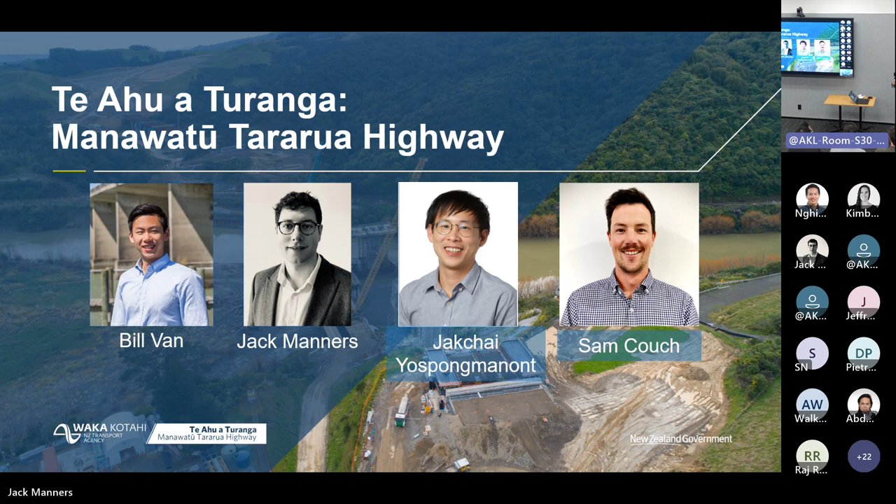Thank you, Kim, as well as the Auckland Bridge Group for inviting us. We're excited to share with you some excellent engineering work and also some lessons learned. I'm joined here with my more esteemed colleagues, Jack, Sam, and Jakchai, and they'll introduce themselves more later on. I'm Bill Van.

Landslides. There have been quite a few landslides in the past, which closed down State Highway 3. And in 2017, it was deemed that it was no longer a safe or resilient route for what is quite an important asset to the bottom of the North Island, and hence the need for this project, Te Ahu a Turanga.

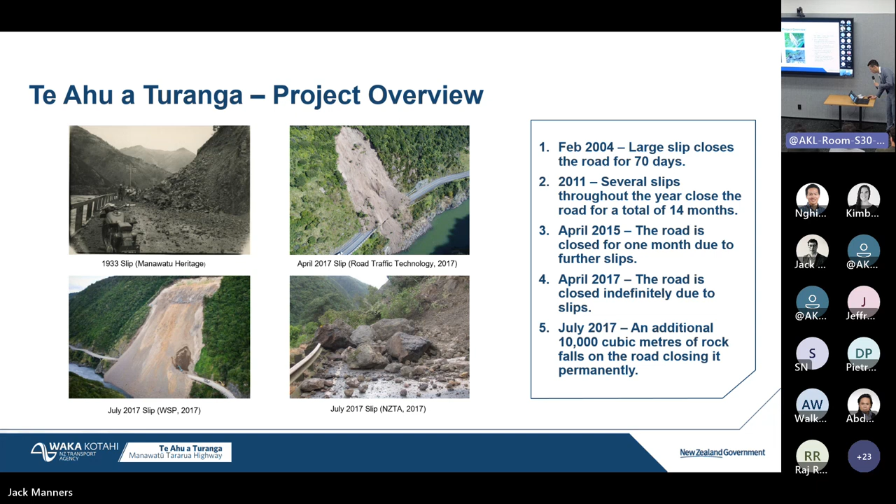The site also poses quite a few challenges. For example, we are in a region of very high seismicity. There is the mighty Manawatū River, which runs underneath the Parahaki Bridge, and also it is very, very windy.

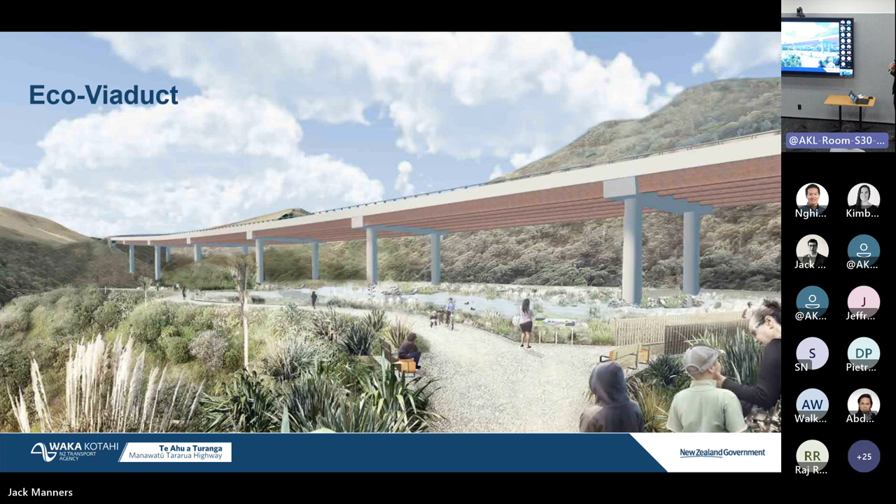Thank you, Bill. Kia ora, everyone. Jack Manners, I'm a bridge engineer here at Aurecon, and as part of the Te Ahu a Turanga Alliance, I worked on the substructure design of Bridge 3, or Eco Viaduct. Fairly brief presentation this evening because we've got a lot to get through, but I'll give a broad overview of the design before going into a bit of depth on the seismic design and philosophy, how we designed for reasonably uncertain ground conditions through the design period, and then touch on one of the key features, the integral pierhead design.

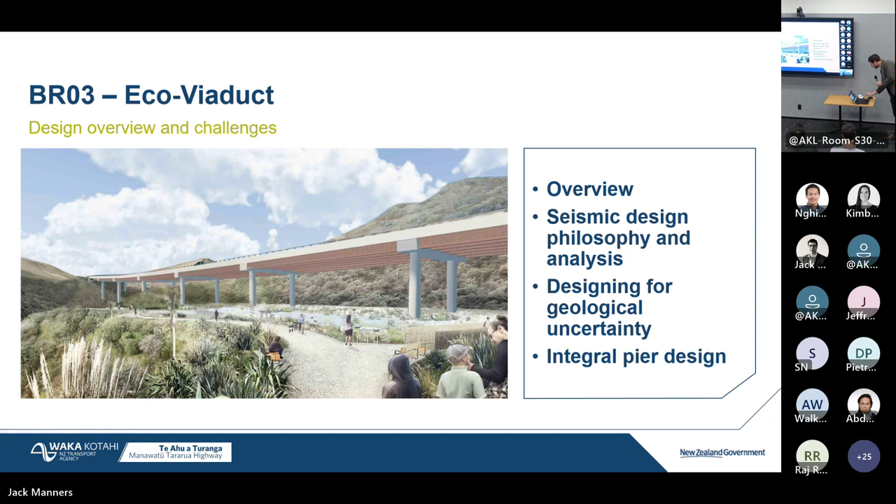So I get this question a lot - Eco Viaduct, why the name? The site and alignment through this area passes through both an ecologically and culturally sensitive zone. On the western edge of the alignment is an old-growth forest of native trees. The southern side has both a swamp maire and a raupo wetland. Historically, this was a mahinga kai area, a harvest area for the local iwi, and the iwi were project partners as part of the alliance.

So these site constraints, some legislated in planning, drove the solution for a viaduct. I get a lot of questions around whether this is a low carbon bridge design - yes, in some ways, but that's not the driver for the name Eco Viaduct. It's to reflect the site that it takes the new State Highway 3 alignment through.

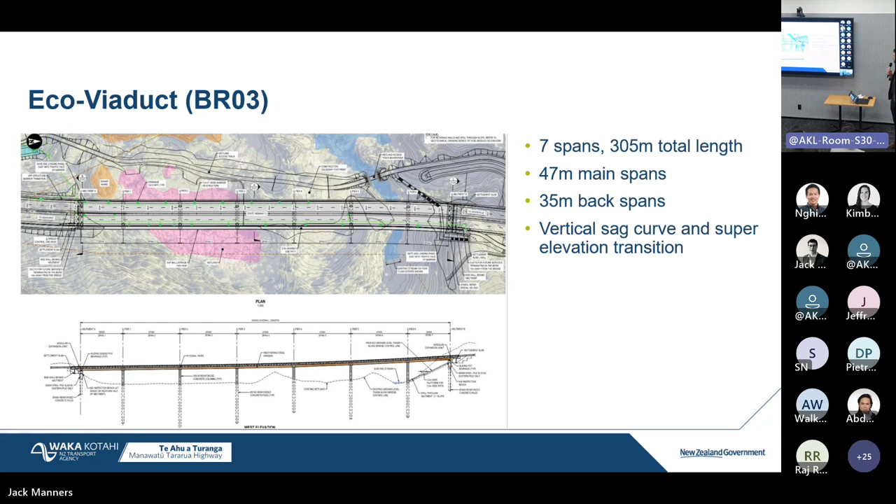Specifically on the bridge: a 7-span structure, 305 metre total length. The 6 main spans are 47 metres long, with 2 back spans of 35 metres. Geometrically it's on a vertical sag curve, and there's a super elevation transition from the south abutment to the north abutment, which posed a few design and construction challenges.

The structure carries 2 traffic lanes in both directions, as well as a shared use path attached to the eastern side of the bridge. The superstructure, which I'm not touching on in too much detail, consists of 1.8 metre deep weathering steel I-girders across piers, made composite with a reinforced concrete deck made up of precast panels and an in-situ topping slab.

The piers are integral, as I mentioned before. We've got a reinforced concrete headstock supported on 1.8 metre diameter reinforced concrete piles, columns, and 2.1 metre bored concrete piles. The articulation at the abutments is on sliding pot bearings and some fairly large modular expansion joints.

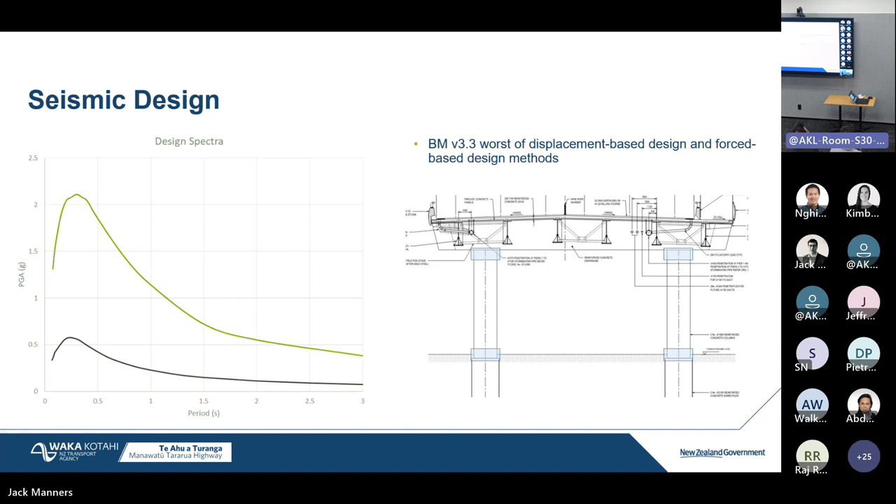Like I said, can't go into too much detail, but a few key overview points: the target displacement transversely under the displacement-based design method was 470 mils transversely at midspan at the DCLS strain limits. Depending on a bunch of factors, including stiffness and geology, the global ductility of the structure under that case was approximately 2.9 to 3.

The image from the analysis model shows an excerpt from the Midas nonlinear pushover analysis, and we used that analysis method more as a confirmation of the displacement-based approach, but also to determine the overstrength actions outside of the plastic hinge zones, particularly at depth in the piles.

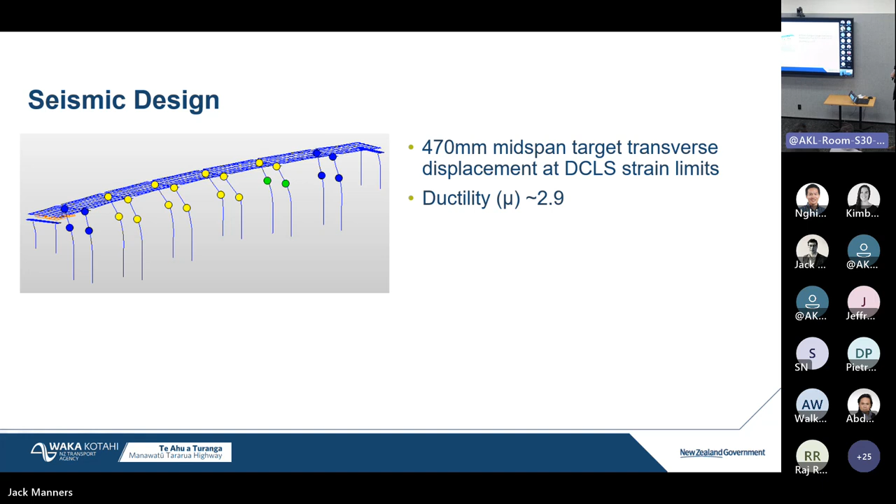And what we found through the process was the force-based design generally gave 5 to 10% higher bending and shear actions than the displacement-based design. And while that increase doesn't drive a totally new solution like a step change in pile size or column diameter, it does increase reinforcement, increases congestion, and probably most notably for this structure, because of that demand, the overstrength actions really shoot up in the adjacent elements to the hinges.

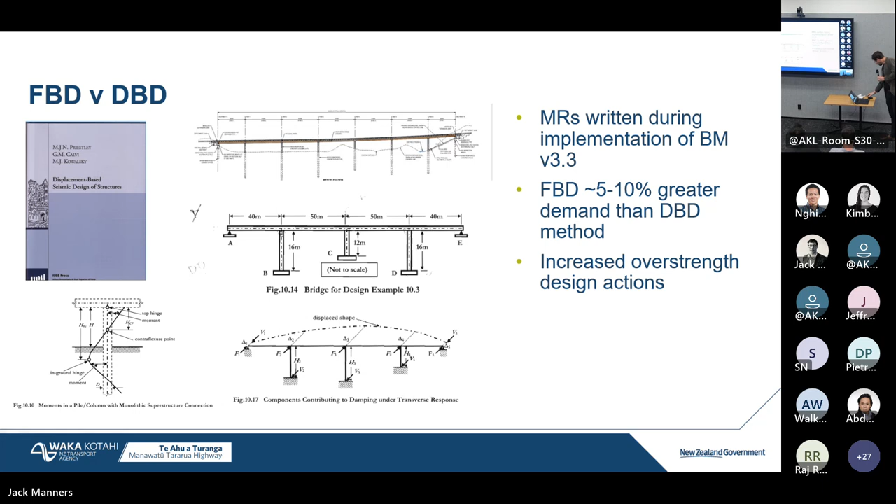The other key challenge for Bridge 3 was what I'm terming designing for geological uncertainty, which is not uncommon on bridge projects, but I think was particularly uncertain for this structure.

And as we came through and completed some of the investigations later on in the design, we encountered quite high artesian water pressures, which Sam's going to touch on in his presentation, which drove a couple of changes in the design, but I won't go too much into it now.

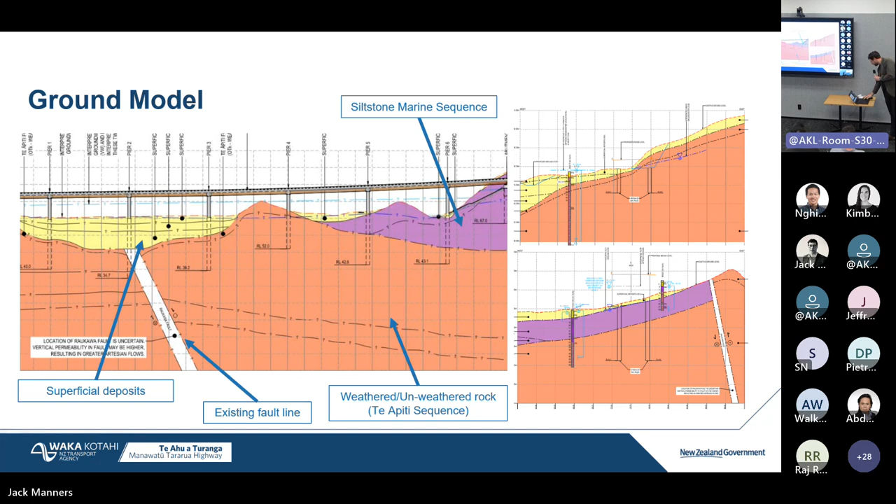So the cross sections shown on the right-hand side of the screen show the predominant slope of the geology through here. And one thing we didn't really have a good feel for was the angle of that slope. So rather than just what we would typically do for the sensitivity of geotechnical conditions, we had to do a little bit more to satisfy ourselves that the design was adequate.

So what we did was, rather than just applying material sensitivity, we did a sensitivity of stratigraphy, where we assumed both the upper bound, or the shallowest conceivable rock head, and the deepest conceivable rock head. And that essentially gives us the stiffest response and the softest response.

On top of that broad category, we also applied material sensitivity. So that ends up in a lot of models, a lot of analysis, and a lot of rework if you make one mistake in one model, or you discover one mistake in a model. But I think it was a good way to mitigate the increased risk that we usually have in terms of geology and uncertainty.

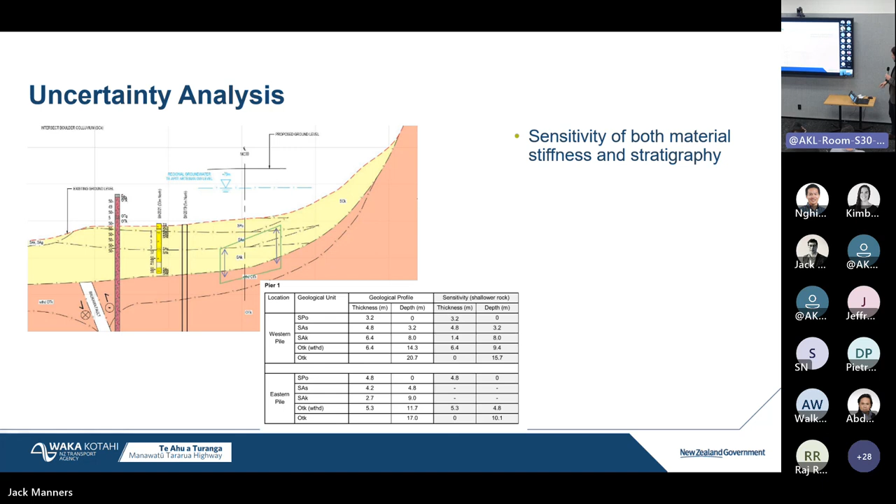The last thing I'd like to talk about is the integral pier. It's a key design feature of the bridge, driven by two key outcome areas: low maintenance design, and as discussed earlier, this is quite a sensitive area, so we're trying to eliminate or minimise the amount of access, particularly from the ground, to the piers. It's also driven by the aesthetic outcome of the bridge and trying to minimise the overall depth of the bridge at the pier locations.

Integral piers aren't anything new. They're becoming increasingly common in New Zealand and are common overseas. Typically what we do is form these in a two-stage pour: pour a concrete headstock element as stage one, land the girders and superstructure on top of it, then cast it integral with a secondary pour. For bridge 3, we essentially eliminated the bottom half of the first pour and poured this as a single stage pour. That minimises the concrete depth and overall material below the bottom flange of the superstructure, which gives a really neat and unique aesthetic look, but does pose some design challenges.

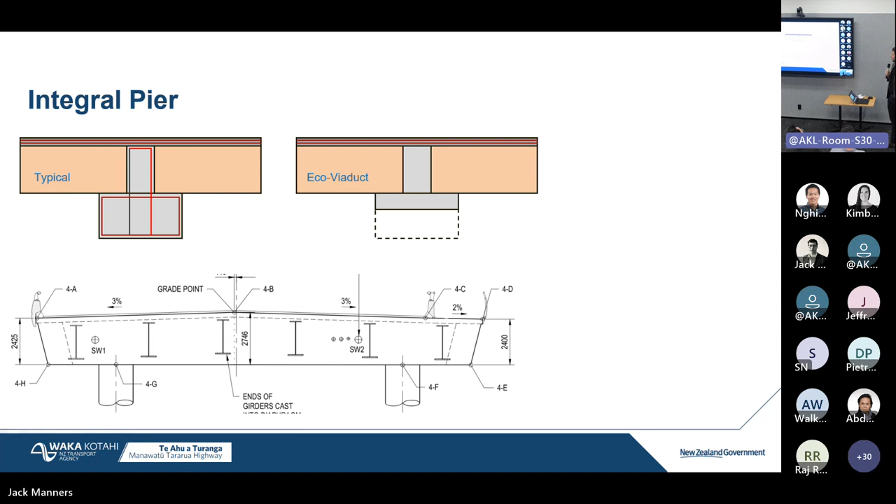Our thinking for this connection definitely progressed through the design process. At 50% design and earlier, we had a solution where we assessed that the top flange of the girder remained permanently in tension and the bottom flange was permanently in compression. So our solution was to take the compression out of the bottom flange through a bearing plate, which eliminated the need for a full splice. The key benefit for the substructure and superstructure design was that it frees up that middle section of the headstock to be used as a continuous structural concrete element through the length of the pier.

But as we progressed the analysis and off the back of some geological modelling that we did, we couldn't convince ourselves that under all seismic load cases the bottom flange remained permanently in compression, so we needed to provide a full splice through the headstock area. This introduces a lot of additional steelwork through the headstock, a lot of bolts and shear studs, and it also removes that continuous concrete element that we previously had running through the centre of the headstock.

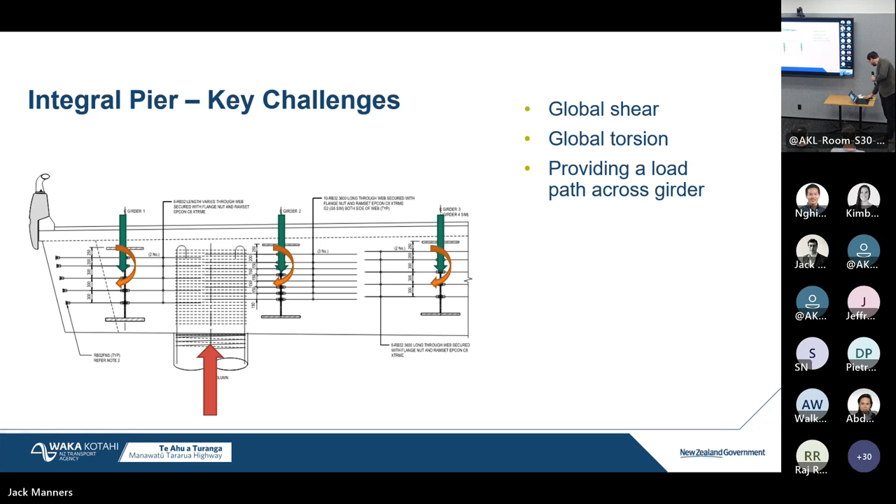For global shear, essentially the philosophy was to take the vertical load that exists in the girders out through both shear studs located on the web, as well as passing bars through the web, which are clamped onto the web using a flange nut through shear friction. The flange nut, which was quite a unique solution, allows us to adopt a higher coefficient of friction in order to take more shear out through those bars than we would just passing bars through a slotted hole.

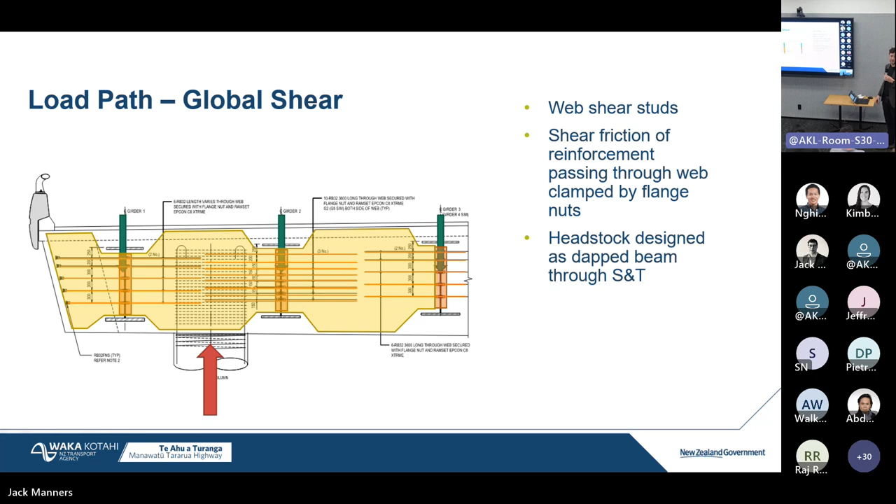In terms of the concrete section, we essentially assumed the section as a series of deep beams, and that was analysed through a strut and tie model, locally reducing the height of the concrete section as it passes through the girder section under the flanges.

Global torsion is a similar problem. We've got to get the torsion that exists in the headstock across these girders. Typically we allow a torsional flow path around the perimeter of the concrete unit, but obviously that flow path is not valid once we put a beam continuously through the section. So what we did was a similar philosophy: taking the bending stresses that exist in the flanges out through shear studs, located on top and below both of the flanges. We then have drag bars, horizontal reinforcing drag bars, through what we've imagined as two 500 deep concrete sections, which act in out-of-plane bending to take the bending stresses from the shear studs into the concrete section, rather than a full tubular wall flow path that we would typically do.

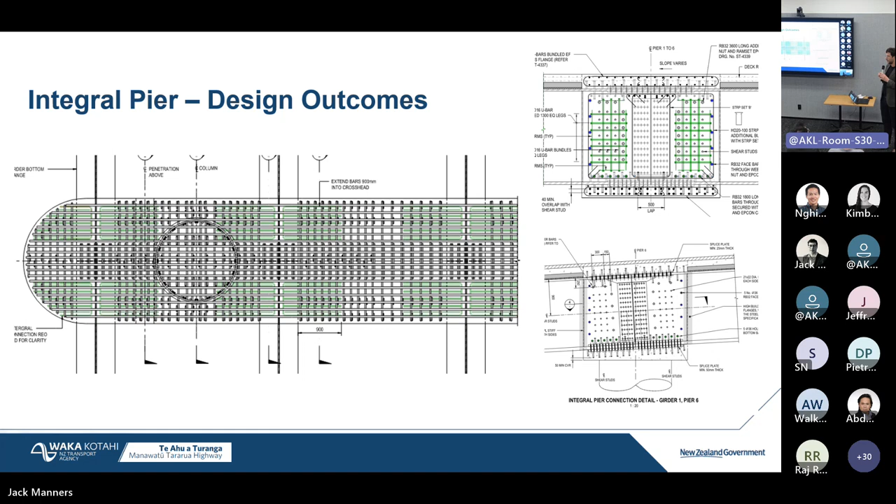In terms of the design outcomes, because of that, a lot of reinforcement. We already had a lot of reinforcement in the headstock due to the overstrength actions based on the hinge at the top of the column. On top of that, we added a number of quite unique bars, including a huge number of shear studs to take out both vertical and bending stresses, as well as bars passing through the girders with flange nuts. So a very unique solution, a lot of reinforcement, which I'm sure Sam will touch on as part of his presentation. But I think all in all, we developed a very unique solution that addresses the site constraints and objectives for the bridge, and has led to a really neat outcome aesthetically, now that you can see them being constructed, and Sam's got some photos of them later. That's all I had for Bridge 3.

Happy to take any questions at the end of the presentation, but I'll now hand to Jakchai to take us through Parahaki Bridge.

Hi everyone, I'm Jakchai, bridge engineer from Aurecon. So I'll be covering Parahaki Bridge today, which I think, let me go to the first slide.

I think Bill already introduced the overall arrangement of the Parahaki Bridge, which I wouldn't repeat. I just want to add one other thing about the substructure scale compared to the superstructure scale. The pier column varies from 19 to 25 meters from pier 1 to pier 3, and the box girder itself has a typical width of around 25.75 meters, which carries both the traffic lanes and the shared path. And in plan view, the bridge is constructed on a horizontal radius of about 725 meters and on a 1% vertical grade.

Next I want to touch on the seismic design criteria and inputs for the bridge. The bridge design life is 100 years in accordance with the bridge manual. We have adopted importance level 3 for the bridge. Our main compliance will be similar to Bridge 3, which is the bridge manual amendment 3, third edition. But we also adopted the AASHTO guide specification for isolation design, because the bridge is proposed to be a base isolated structure. For the DCLS event earthquake, the RU is taken as 1.3 at a 1,000 year return period. Typically for the collapse avoidance limit state it would be 1.5 times the DCLS, and for SLS it would be a quarter of the DCLS.

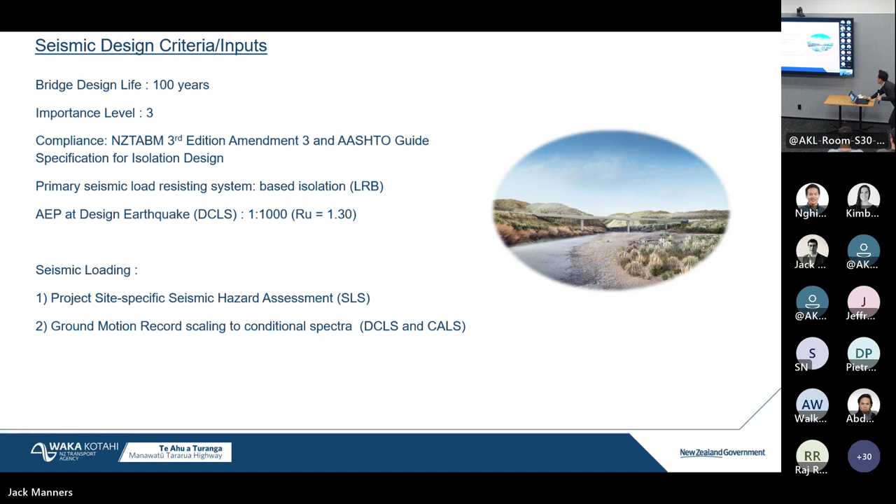This slide shows a snapshot where the table is the ground motion record input that we received from EGL, an engineering geology consultant. Basically we have a total of 7 records, and each record has been scaled and selected to be appropriate to the conditional spectra for the project. Records 3 to 5 have directivity effects, or forward directivity, reflecting the fact that the bridge is located in the proximity of an active fault, within 20 kilometers, so near fault consideration needs to be considered. Also, the 1170.5 earthquake standard requires 1 in 3 of the ground motions to have forward directivity effects, which is why we have that.

I will not touch on the detailed nonlinear time history analysis today because of time limits, but I want to point out why we propose to use it for the bridge. First, the bridge is located within 10 kilometers of 2 faults, and we don't really know the final status of the faults, whether they will be active or not, but we assume them to be active. In the early stage of the design, we understood that the site condition can be a soft soil site. Lastly, we want to understand the detailed dynamic behavior of the isolator, so we can understand the loading history and review the design outcome of the isolator better.

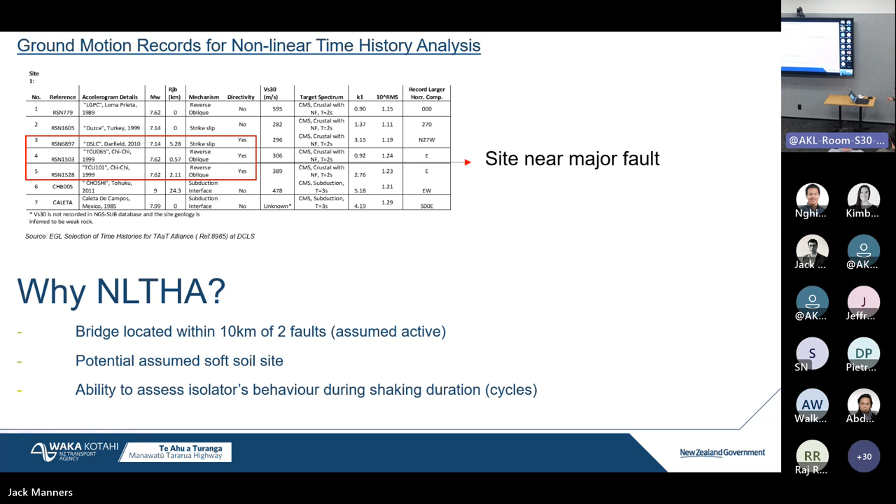Okay, next slide. So next one is for the seismic design philosophy for the bridge. In the SLS earthquake limit state, we expect no damage incurred to the bridge structure, and the bridge will be serviceable during the earthquake event at the service limit state.

Next one is the damage control limit state, which I put as the low damage design approach. Basically we want to design up to the design earthquake event. We propose the bridge to be base isolated so that the lead bearing can dissipate the earthquake energy, reducing the seismic demand, so that the substructure can be designed to remain elastic and therefore no repair is needed at the design earthquake event.

So at the collapse avoidance limit state, we expect the bridge to respond in a limited ductile manner at the maximum design displacement of the isolator. Basically, the design may allow some inelastic response of the pier column, which can be accessible for repair after the major earthquake event.

I think I should go to the next slide to give everyone an overview of the substructure system. Before I come back to the design philosophy, the abutment is a shallow footing foundation sitting on the preparation of the geotechnical subgrade, and the abutment is 6.5 meters wide by 2 meters deep. The total width of the abutment to carry the box girder is about 26 meters, as you can see on the screen.

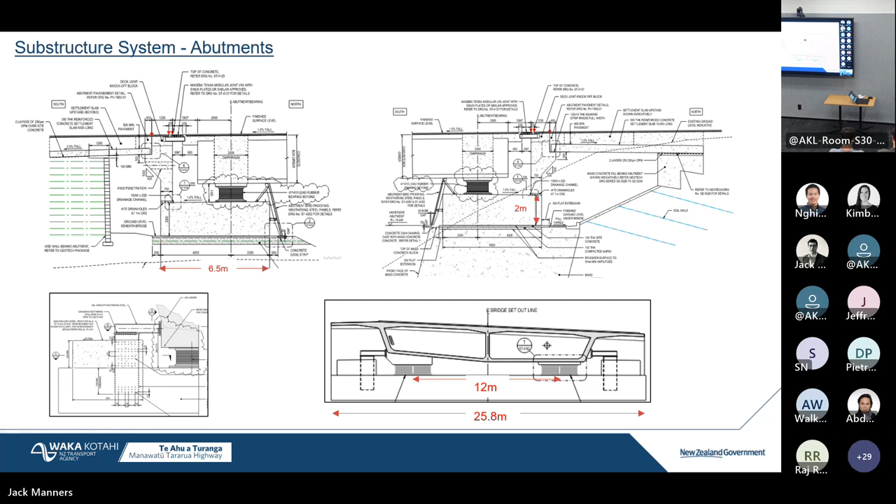Next one is the pier system. The pier system is a cantilever reinforced concrete column. The pier shape has an oblong-like cross section with a hollow core section, but the top 2 meters of the pier is a solid section to support the lead rubber bearing and also the superstructure on top of it.

Then the pier column will be supported on top of a 14 by 14 meter and 3 meter deep pile cap, which sits on 8 number reinforced concrete bored piles, with the diameter of the pile being 2.1 meters.

I think Sam will touch on this during the challenges in construction, but at pier 3 here, we need to rotate our pile cap quite a bit, about 39 degrees, which makes it irregular. We did it to ensure that the clearance to the hazard inner zone to the rail can be achieved, and it has to be greater than 10 meters.

Okay, so this slide here is the main thing I would like to cover today, and it is about the base isolated structure. As I said before, we propose to use the lead rubber bearing isolator as the primary earthquake load resisting system.

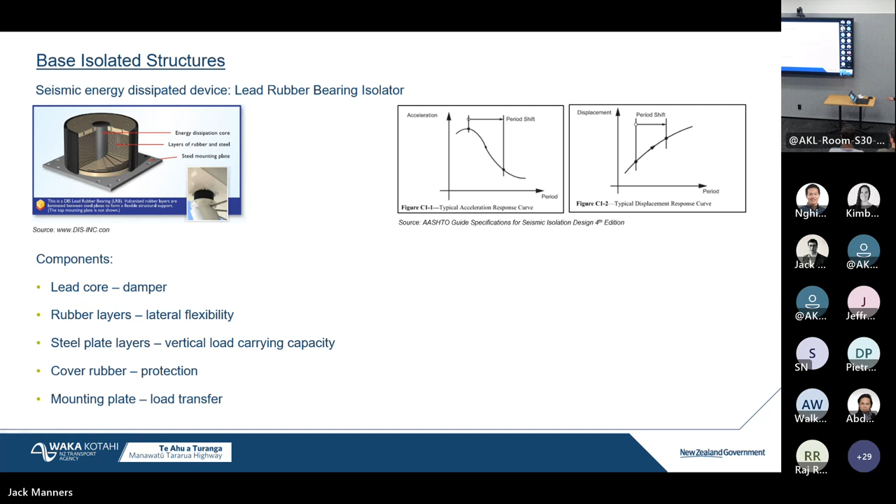So what we want to make sure is our design is capable of resisting the maximum shear strain that occurs to the isolator. I want to give a commentary on this: in the bridge manual, it says that under an earthquake event, when you use the elastomeric bearing or lead rubber bearing, you shouldn't exceed, I think, 100% shear strain.

But from study of the International Code of Practice, there were other limits, like 200% shear strain and up to 250% shear strain. So in our project, we propose our limiting shear strain to be 250% at the maximum design displacement, which I will touch on at the end of the slide, explaining why we think this is achievable.

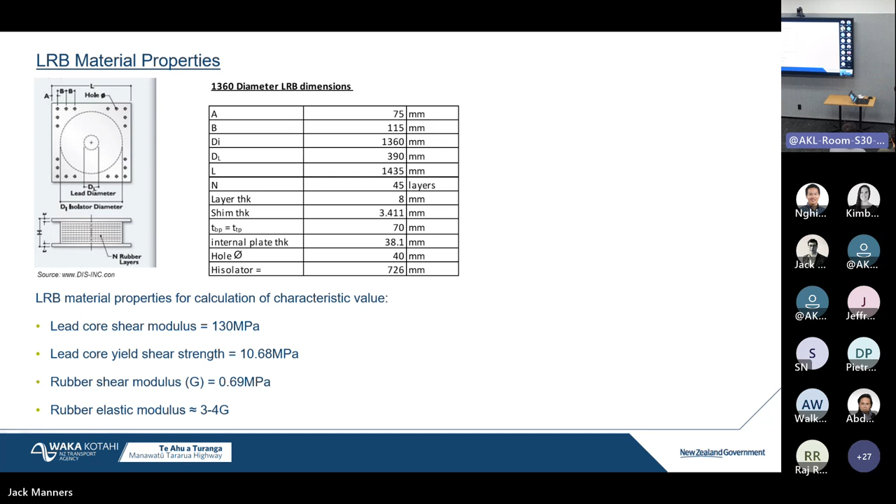These material properties that I put here, I think they are quite typical and accepted in the industry for the lead rubber bearing.

For the vertical direction, the way to calculate the compressive stiffness is straightforward, and this can be given by the suppliers as well.

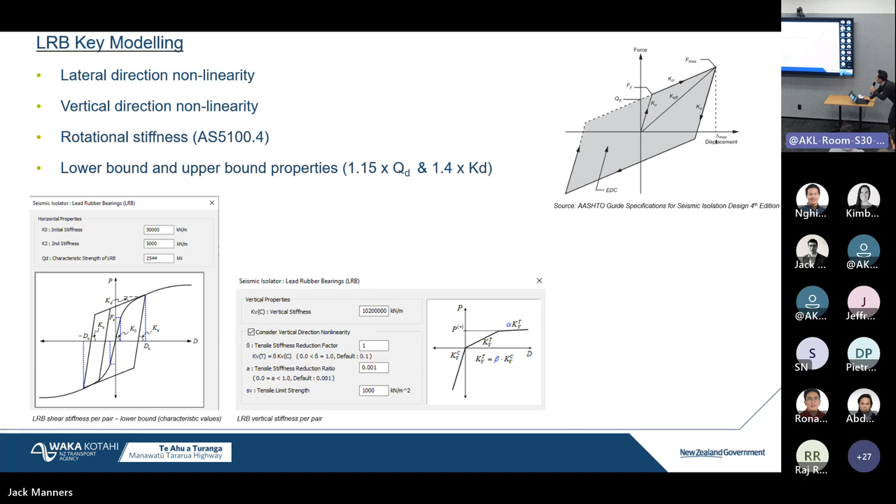So that I think I have covered the key modeling that we have considered.

This slide here, I just want to talk about for 10 seconds. I'm not trying to get everyone to read through the graph, but I just want to say that from now on I will present some key findings. When we obtain the displacement from the model, we have to average it across the 7 records that we input into our structural model. So the design displacement will be the averaging of peak response over maxima and minima across the 7 records that we have.

The first key finding: we ran the model considering soil structure interaction, as typically required, and also the lower bound and upper bound property of the bearing. For the maximum design displacement of the lead rubber bearing in our bridge, we got it to be around 955 millimeters, with a corresponding axial load of about 6 meganewtons.

After we obtain the desired displacement, we make sure it works from the supplier side as well for the size. Then we can calculate the effective isolated structural period at the collapse avoidance limit state, which is 3.2 seconds, and the energy dissipation per cycle, which is about 4,500 kilojoules. Then we calculated the rated axial capacity at the maximum total design displacement, which is about 14 meganewtons per bearing. So the capacity is beyond the demand.

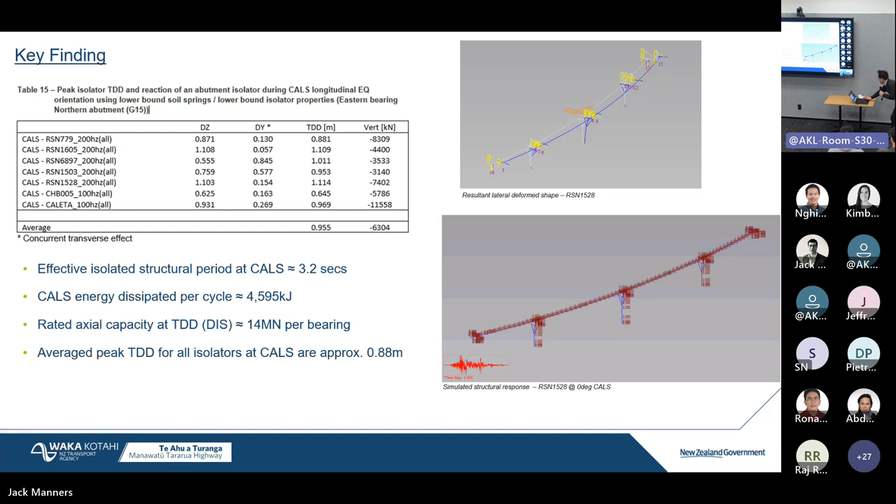That's it, it helped a little bit. Okay, so the next key finding.

We hope it did not happen, but as it happened, we justify that we calculate the tensile stress based on this tension demand, and it's about 0.25 MPa. Also, the tension demand occurs at only one pair out of all the lead rubber bearings in the system, which we have about 26 bearings in total. We can also equate the tensile stress demand into the corresponding uplift deformation, which is less than 2 millimeters.

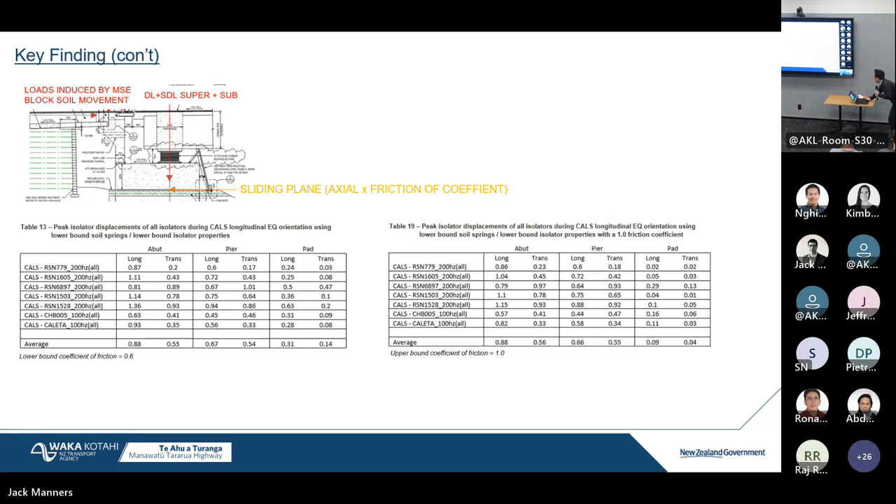And my last slide - I just want to cover the seismic performance verification. Once we finished our proposed design, we also want to ensure that the lead rubber bearing configuration we propose is going to work, and this is going to be done via verification testing. We base our verification testing on the AASHTO specification again. Basically we have to test for sustained compressive load, wind and braking test before and after the seismic event, stability tests, and wear and fatigue tests. But I won't go into too much detail on this - I just want to turn on the video and show you how it was done for our project.

Okay, that's it. So basically, this is the test at the second cycle, and the bearing was tested to displace up to the collapse avoidance limit state displacement, and it still looked okay, which I'm happy with. The last one here is just the plot of the force and deformation relationship. I think, just to make sure that the energy dissipation and everything that we set out in our specification can be met.

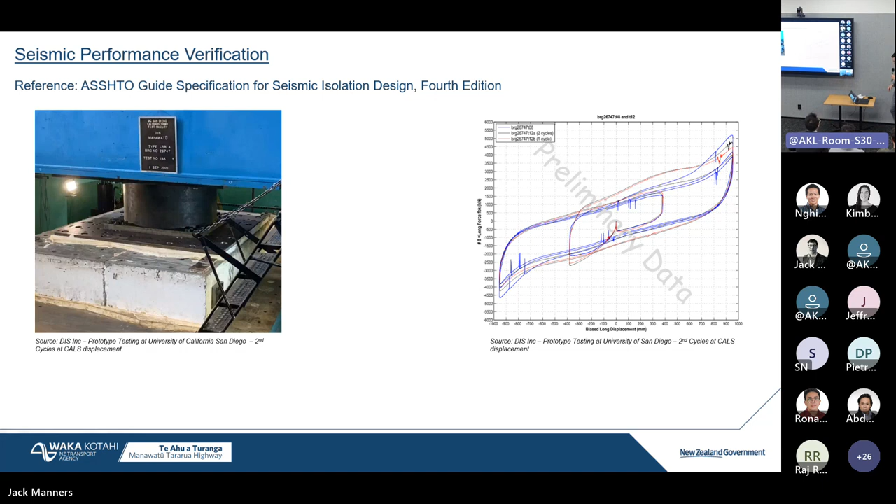Cool. Thanks, Jack. I've watched that video many, many times, and I always wonder, is it going to break this time? But it never does.

Okay, so I'm Bill, and I'm part of the Road Lab team and the lead superstructure designer for the Parahaki Bridge. I was asked to reflect on what's the most difficult or challenging part of the design. And I've got to say, it must be one thing, and it is the interaction between the permanent works and temporary works.

I just want to do a quick population survey. Who here is in the consultant space? And the construction space, contractors? Right, okay, I'll just have to watch what I say.

This presentation isn't going to have all the details or include everything, but I just want to highlight the complexity of this interaction. And for a successful project, this is critical.

So this bridge is built by the balanced cantilever method. In general, we're starting construction from the piers, then building segment by segment in balance. So to walk you through the construction sequence, first the substructure is completed. Then we construct the pier diaphragm as well as the southern end span. This portion of the bridge has to be built on falsework, because structurally the end span is usually longer than the cantilever of the bridge, so it can't be built in balance.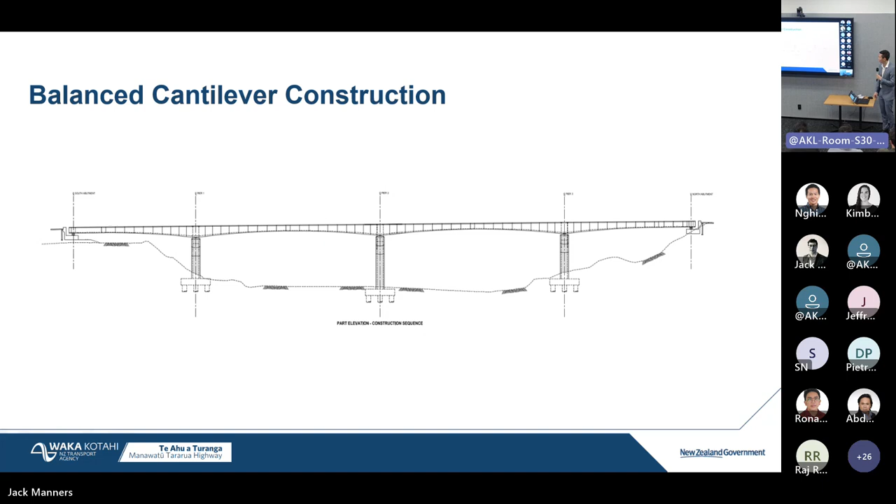So I want to focus on two key components of this construction methodology and some of the temporary works: the form traveler and the end span falsework. This presentation looks at how the design evolves and what are some of the interactions between the permanent works designer and the temporary works designer. It might be old news for some of you who have designed multiple box girders, but hopefully it gives you insight into the key considerations when designing your first box girder bridge.

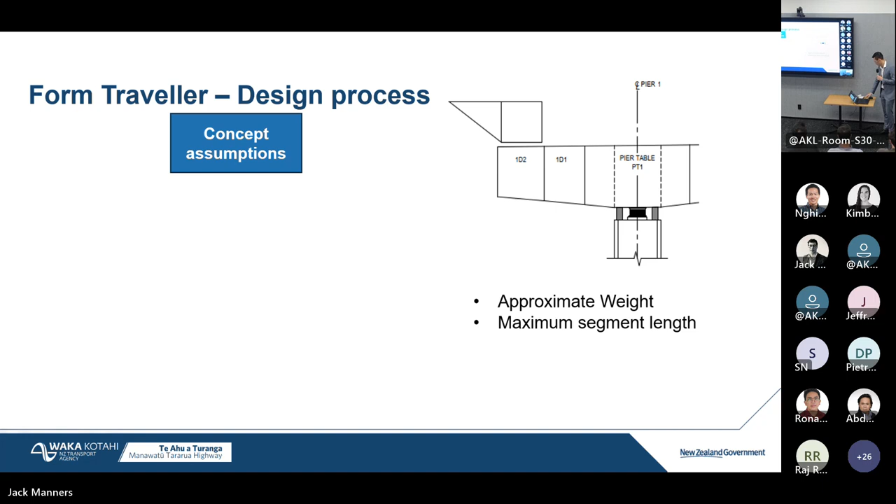So for the form traveler, the concept assumption is pretty simplistic - just a simple shape and an assumed form traveler weight based on a proportion of your maximum segment weight. When it comes to the preliminary design, the designer will be thinking about the post-tensioning layout, the SLS and ULS design criteria, not only for when the bridge is in service, but also when the bridge is under construction.

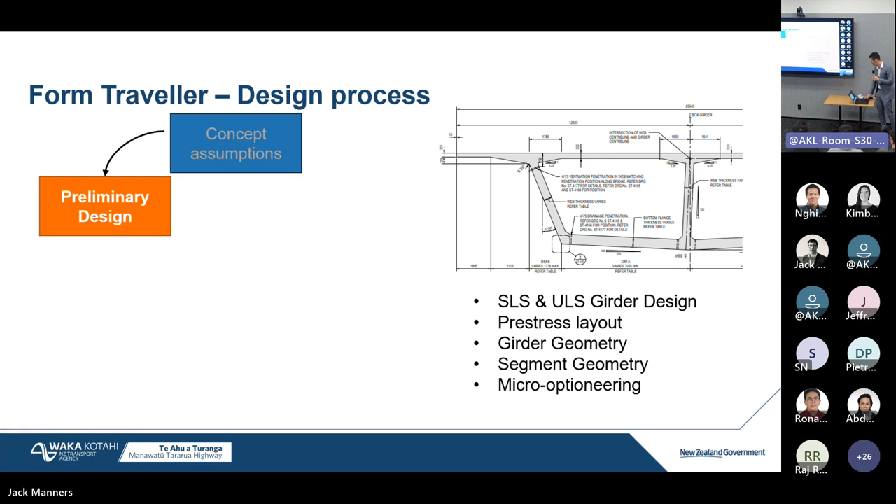This bridge is also a variable depth box girder, meaning it's deeper at the pier and slims down to just 2.5 meters, almost half the depth at midspan - giving a very aesthetic look as well as structural benefits. We'll be looking at how the web thicknesses may need to transition and how all these geometries are confirmed.

With this information, the form traveler designer will be able to look at various features of the form traveler. For example, with this variable depth, how will the formwork allow for these changes? And there could be a change in the form traveler weight.

One of the interactions we looked at, one of the value engineering exercises from early stages, was: could we reduce the program by reducing the number of segments from 10 to 9? It might seem like quite a simple change, but it affects the segment length, the segment weight, the form traveler weight, the post-tensioning layout - everything's connected. So when looking at these early optioneering stages, it's really important that the bridge designer, the construction team, and the temporary works designer work very closely together.

Okay, so it comes down to detailed design. The bridge designer will be looking at confirming girder geometries, confirming the construction sequence, every pour that's made, every stressing operation that happens will have to be modeled in a structural analysis software. Then we also produce reinforcement details and look at how to control the deflection of the bridge when it's being constructed.

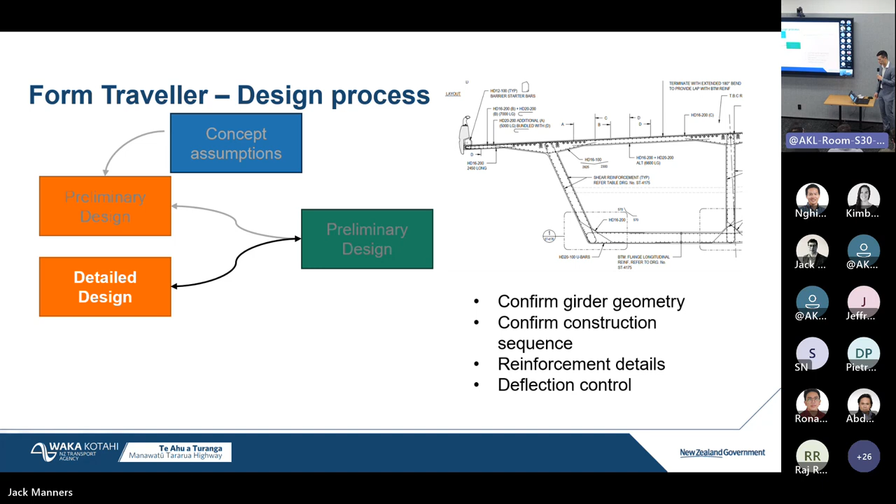And with that finalized, then the form traveler designer can undertake their detailed design. Now this is possibly the most difficult part, when the design requirements of the permanent works and the design requirements of the temporary works conflict. For example, one of the key items still missing in the detailed design is how the girder is going to resist some very localized loads from the form traveler. And this information we don't have until the form traveler design is completed.

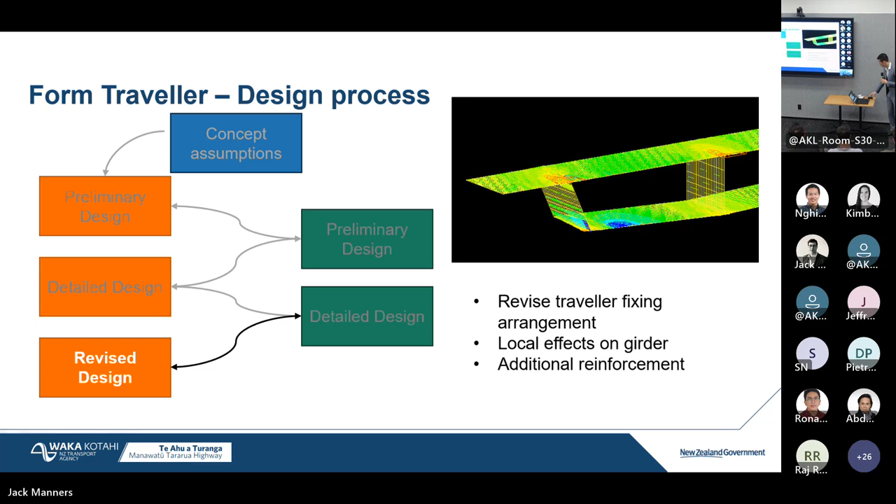I think often it feels like a game of guess who. When you're sitting on the other side of the table, someone else knows the information that you want. So being able to ask the right questions is really an art. I know the analogy kind of breaks down because you don't want the other person on the other side to win and you don't want them to figure it out, but this is the nature of things. We have to be able to interact with various parties.

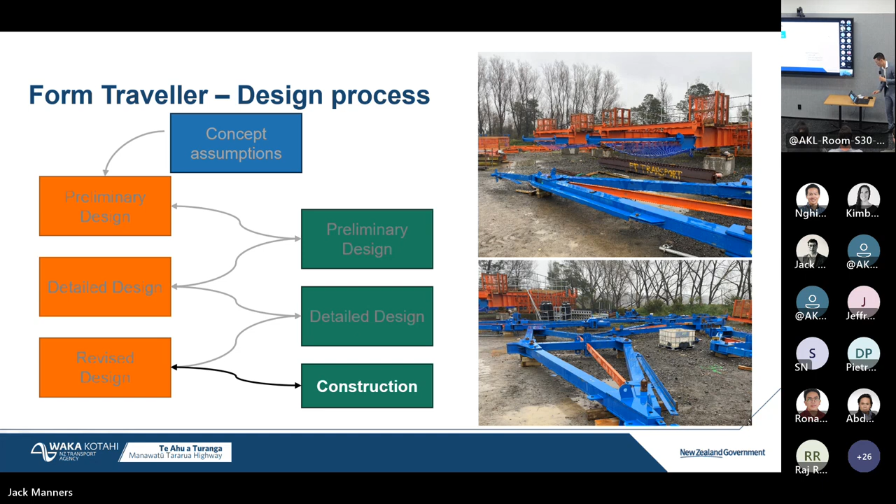Okay, and I want to talk about the end span falsework because I think it really shows off where value engineering finds a better outcome. So the question here is, we've got our balanced cantilever construction with the form traveler reaching out as far as it can go, but then there's still 17 meters that needs to be constructed. And how do we do that?

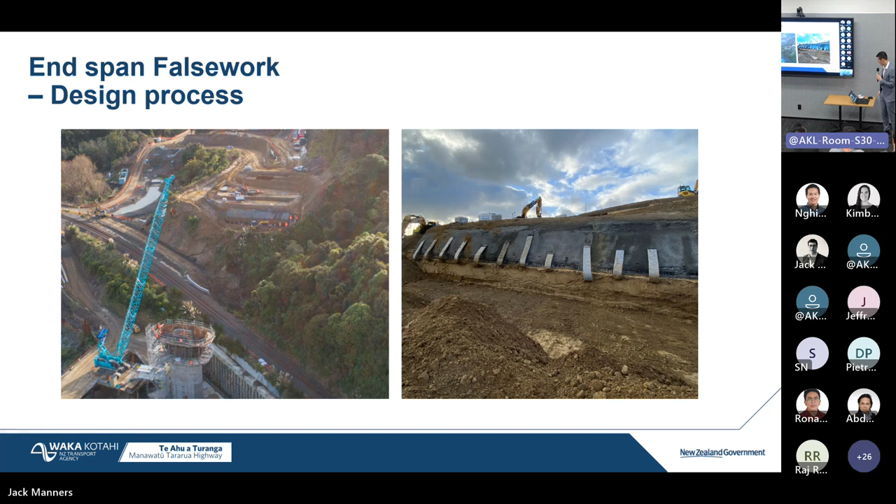So from conceptual design, we thought, what if we continue building this bridge via a cantilever method, but prop it at the bottom to take out the out-of-balance forces? We did find that it needed some complex articulation because we wanted to hold it up vertically, but we don't want it to attract any seismic loads. And also we found that we needed a lot of additional reinforcement in the top flange to hold that cantilever.

When it came to the preliminary design for the temporary works, they also found quite a few challenges. There is a railway that runs next to the prop, maybe 10 meters away, so needing to design for that collision load in the prop was quite onerous. And additionally, there was a cost to program because we still needed to build out 3 segments in cycles.

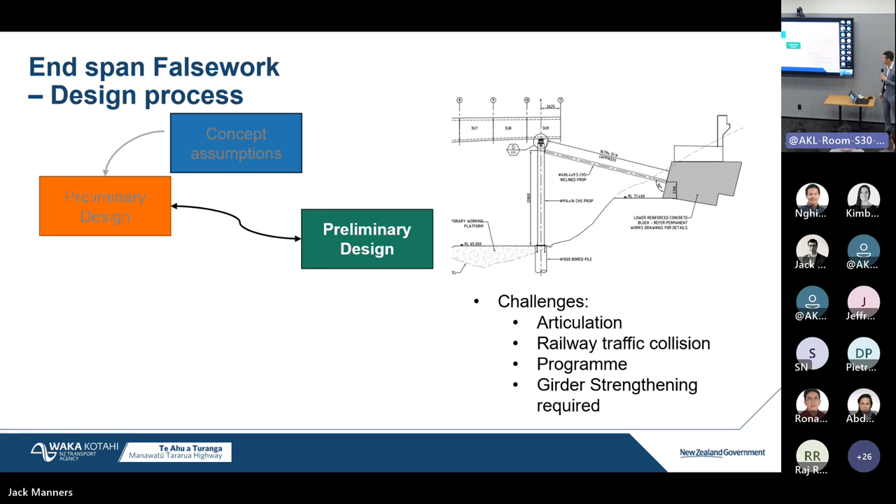So I got to give credit to our temporary works designer, because sometimes coming in with fresh eyes you're able to see options that haven't been discovered previously. This resembles a bit more of a traditional false work, and the temporary works designers were able to find a solution to build false work even on the 15-meter cliff. It has quite a few benefits.

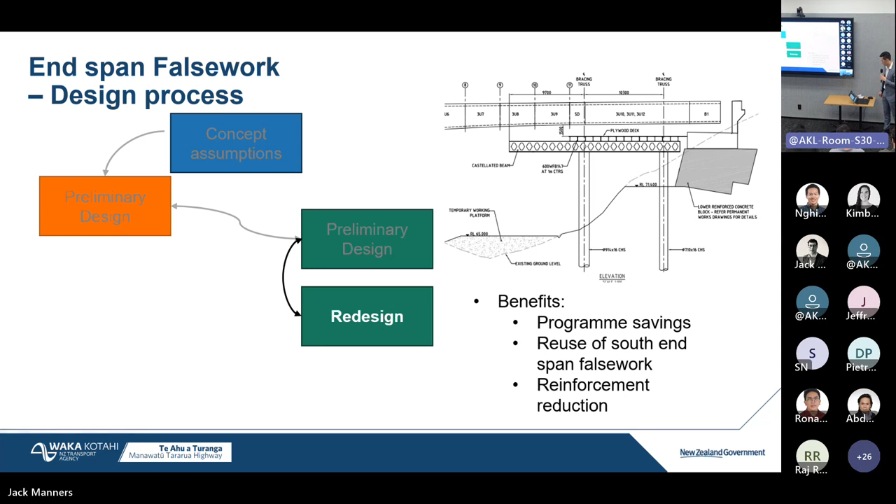For example, we can now build those end segments prior to the balanced cantilever being constructed, and I'm sure Sam's going to touch on it in his presentation. It also has reinforcement reductions.

And at the same time, we are facing quite a few uncertainties in terms of how the bridge behaves. Having a misaligned tip is probably the worst nightmare for building a balanced cantilever bridge, because you're not left with many options. Either you force the tips together, causing a large locked-in stress, or you try to fill it up with leveling course, which increases the weight of your bridge.

So this is critical. The uncertainties that we face include variability in concrete properties — as you know, concrete will creep and shrink over time. Also temperature: for the maximum bridge manual temperature loads, you could see your tip go up and down by 50 mils. So being able to survey at the right time, at the right temperature, is really important.

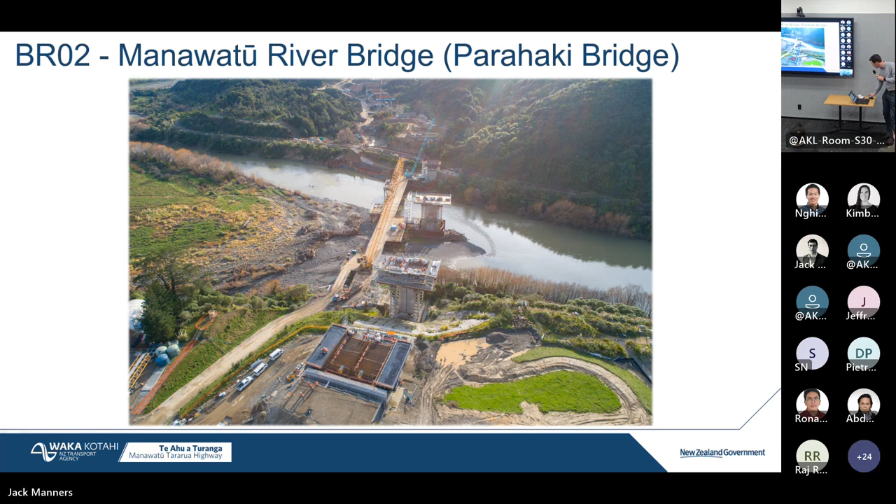This is another quick photo looking up the river. You can see the old State Highway 3 disappearing up the gorge. Got the KiwiRail corridor on the left, which is one of our challenging obstructions in the area. You've got the river itself, and you can just make out one of the biggest slips just up the river on the right-hand side, which has completely buried that road. So that road's pretty much shut off, but people do walk up there. It gives an idea of scale.

One of the big focuses when this bridge was designed was to try and avoid as many piers in the river as possible. So you've got one slap bang in the middle, but the other two are right on the riverbanks.

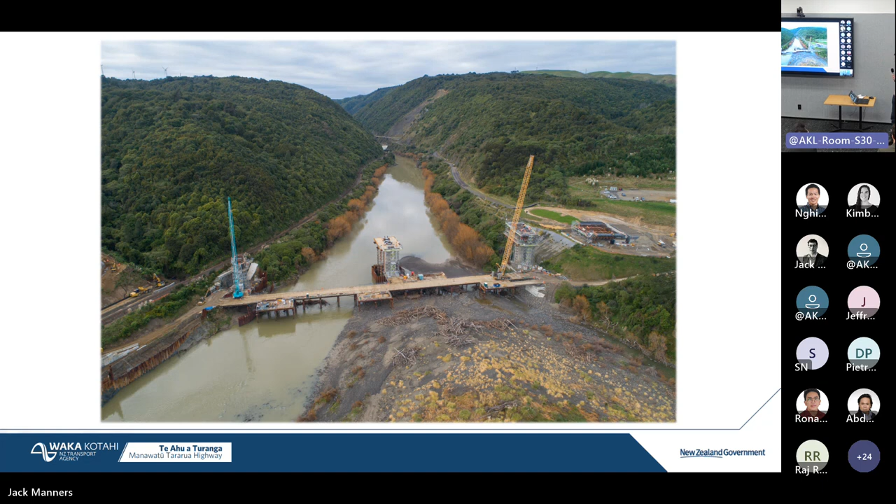You just saw this photo a second ago from Bill. Pier 3 is at the stage of the penultimate pour, so we hope to have all piers complete by the end of this month. One thing Jack Chai touched on, which caused a few challenges, is that the KiwiRail corridor meant the pier relative to the pile cap had to be rotated relative to one another. So the reinforcement effectively rotated as you came up through the 3 metre height of the pile cap by 39 degrees, which is an interesting number.

You can kind of see that in the image. I guess this challenge, or this change, did present a few problems for us. Each pile cap is about 588 cubes of concrete, poured in 3 lifts.

Part of our challenge, which you can already pick up on, is how do we go about building a bridge like this? How do we get access in? We've got the riverbed itself. There are some cultural anomalies picked up through GPR survey, so we can't go through certain areas of Parahaki Island. We've got the river itself and quite a big interface with it. The river fluctuates hugely in height during high flood events, picking up the Hawke's Bay catchment area, and you'll see a photo of that later. We've also got steep slopes on either side and generally challenging ground conditions, so it's very important when designing a bridge like this to consider what access will be like for all that equipment.

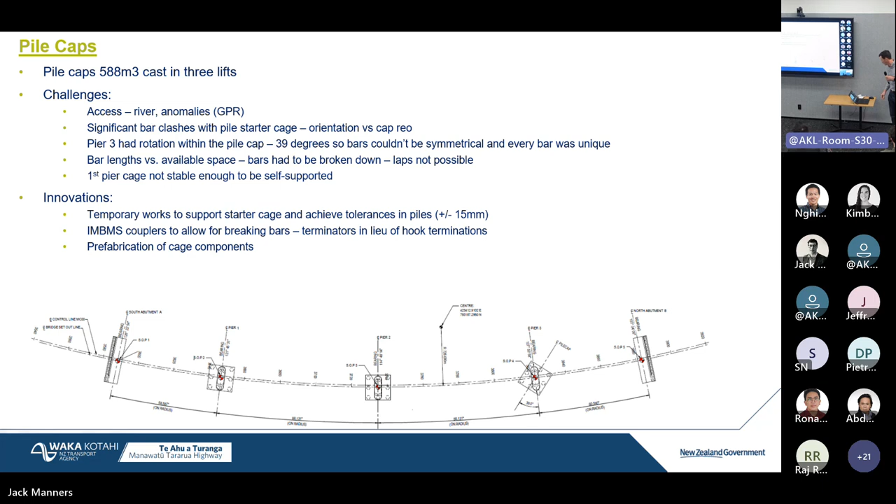Big innovations on the pile caps themselves. We had temporary works to support the starter cage. The starter cage for the piers is pretty significant and cannot support its own weight, so that has to be suspended partway through the pour. We used IMBMS couplers to allow for breaking bars in lieu of the hook terminations, and then prefabrication of the components to drive time and quality on site and maintain continuity of fixing.

And then it's getting into each of these areas at all stages of the weather, so you basically have to get your staging in right over the top of each pile, so if the rain comes and the water levels rise, it's not going to stop you working.

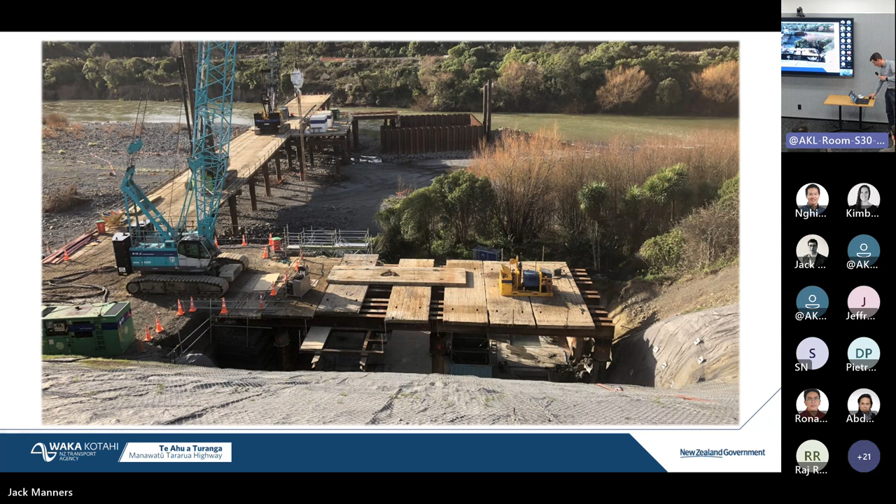And after events like this, you have to go in and do huge inspections on all of your temporary works, all of your staging through there - lift it up, inspect it. Your scaffold, you have to go down and clear around the bottom, so working in some pretty horrible conditions with the sediment down there as well.

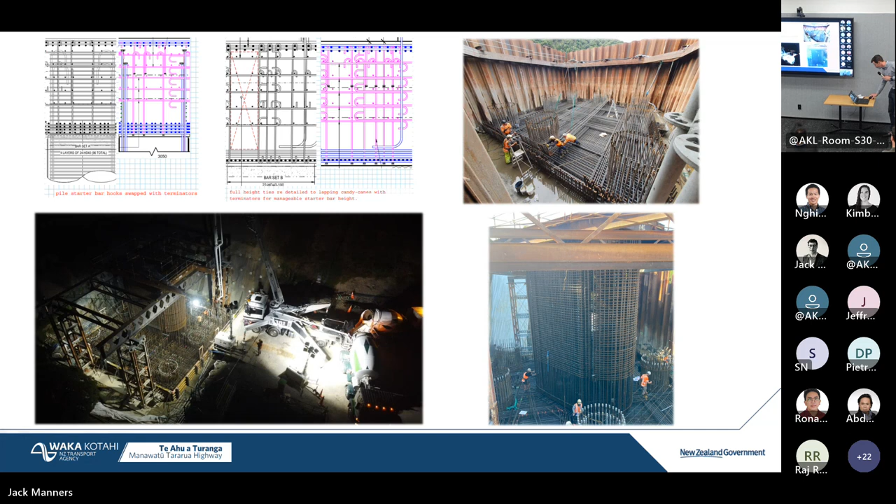Moving quickly on to the pier columns, 25 meters in height. It's the biggest one, and they're hollow pier columns. The top 2 meters is a big solid mass, which accommodates the load transfer and the connections with the lead rubber bearings.

We had a custom jump form system. It's a very unique shape, and shape has been a key challenge right the way through. The radial edges and the density of reinforcement relative to that shape have proved challenging.

There's a mahi toi relief pattern cast into the sides of the piers, about 50 mil deep. That's actually been a bit of a saving grace — that 50 mil has given us some cover tolerance on the radial sections of these piers with the density of reinforcement we have.

The shape has led to bespoke molds, so we can't use standard formwork systems, or we have to modify them, which adds challenge. Access for feeding bars in is also difficult with a jump form system, so we ended up scaffolding around the whole thing, which was actually far quicker. The cost of scaffold versus just providing better access made that well and truly justified.

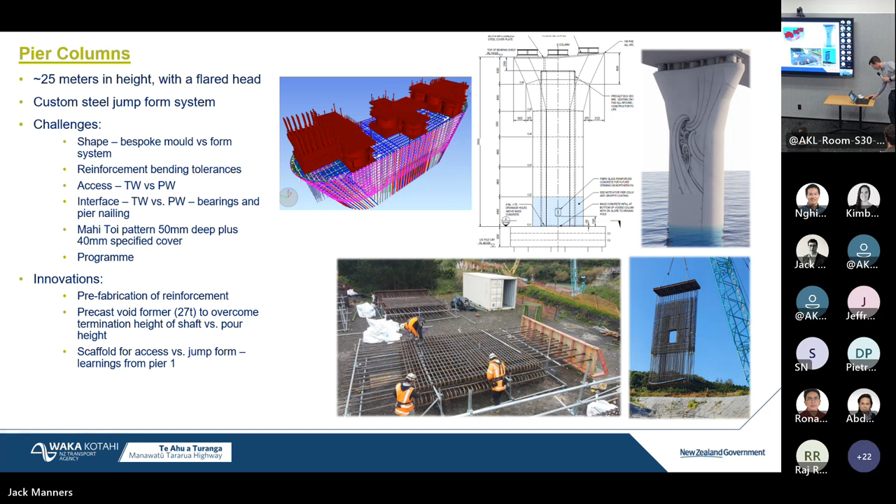In the left image, the people are there for scale — they are full-sized people. There's a huge amount of density in the reinforcement. When you've got a shape like that with limited access, getting that shape right is really important.

You've got surveyors with a model in their instrument actually surveying every single bar to get it right. You struggle with where to survey on that radius, where to put the instrument on the bar to make sure you've got the shape right, and what you're building your reinforcement off — setting up profiles adds that complexity again. Then you've got a heap of embedded items in the top too, in the form of your sole plate connections and bearings.

Looking into the corner, this is the radial section at the termination of the pier, where you've got all the hook terminations. This gives you a real idea of the density of bars — 25s, 32s, and 40 mil bars in this section. You've also got embedded items, some of which go 1.2 meters down inside the pier, which gives you an idea of the congestion.

The biggest problem then is how do you get concrete in through that? So we used self-compacting concrete. We had steel forms for the top section with ports for the concrete, did a trial pour, and really critically analysed how we were pouring the top of this pier head. We were very concerned about achieving the slope on top with a self-compacting mix — there's about 300 mil crossfall on the top, and self-compacting mixes tend to want to stay flat.

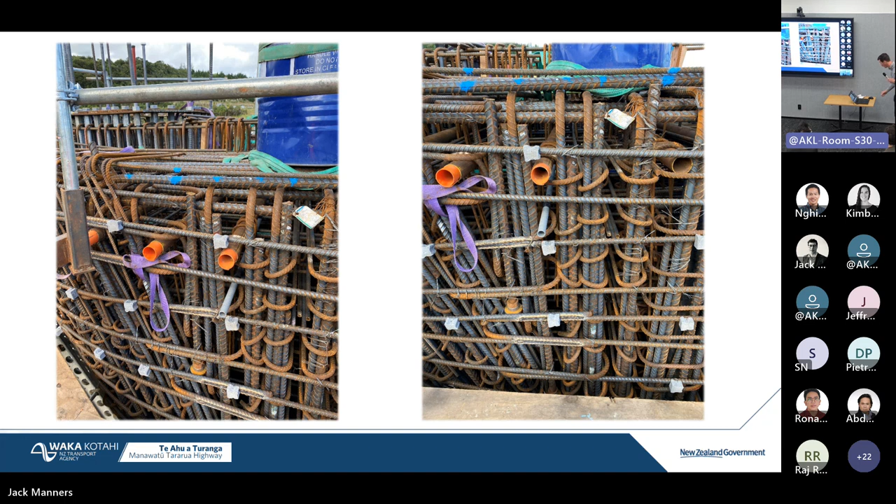So yeah, big challenges, but because we were conscientious about it, all three have actually gone really very well. Well, two have gone very well, and we're just coming on to the third one now later this week.

As part of the interface with the lead rubber bearings, they sit in pairs. There's 6 of them in total on top of the pier, sitting in pairs on top of these sole plates. Sole plates connect into the rear of the top of the pour with about 300 mil embedment, so you can't pour that with in situ concrete. You have to pour that with a grout or micro concrete. It's 300 mil thick, which basically rules out most grouts available in New Zealand.

As part of the process, we have to do a glass plate trial to ensure we get 90% coverage underneath that sole plate, because you can't see through the steel. So you do it under perspex, and you can't have a void of more than 50 mil. It's pretty challenging to achieve that, and you have to prove it in advance.

8 trials were undertaken. The cost of a glass plate trial is about $20,000, so they're pretty expensive. One challenge is because the grout isn't available in New Zealand, you need to bring in significant quantities to do the trial. If the trial isn't a success, you either scrap the grout you've ordered or go procure another amount, most of which comes over from Australia or the US.

But the positives: we did replicate site conditions as far as possible, that's the top left image. We found the best solution was 4 ports on the short end, not on the long side. We angled them slightly up towards the plate, sealed the box except for the outer end, allowed air through the other end, and then over poured quite significantly to get it out through.

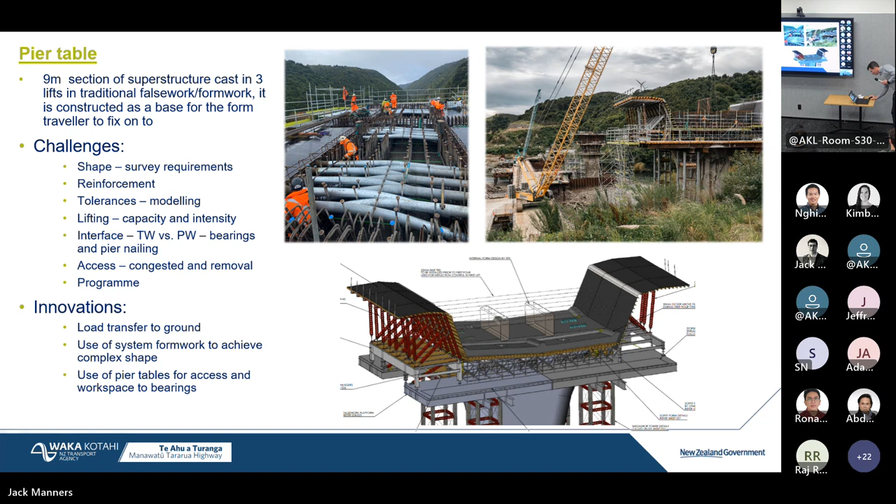Superstructure segments are cast monolithically, so the span, floor, diaphragm, walls and roof are poured as one, from the top. There's a specific pour methodology, and we've done some trials on site.

Ultimately, you have to pour the bottom of your walls and floors, then your walls, then your roof, and then go and do the other side. There's about 80 to 100 cube in each segment, and then you start the journey all over again.

There's a big permanent works and temporary works interface in terms of embedded items. That form traveller has a lot of embedded items running through the previous segments in order to progress. It runs on a set of rails, with bars penetrating through the deck to support the internal soffits and allow it to roll forward. When designing the rebar, it's about how you get it in there with that amount of temporary works hanging over the top of you.

On innovations - this really drives your program in a balanced cantilever method, so making this method as efficient as possible is really important. We pre-assemble as much of the form traveller as possible, prefab the rebar, and modify the form traveller where possible to get as much prefab rebar in as possible.

Your concrete mix is really key, because curing time overseas might not be so much of a problem, but achieving 30 MPa within 24 hours here can be a problem, especially in winter in a very windy area where the weather can be pretty bad.

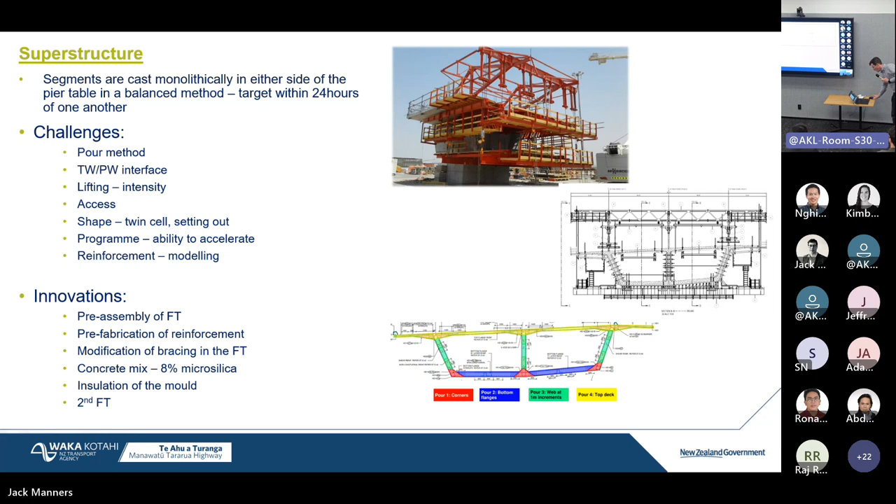Insulating the mould was probably the biggest lesson we've taken from talking to a load of people here and overseas. Then there's the shape problem - in the red box is a typical cross section of the bridge, covering the entire bridge from the design pack.

From a constructor's perspective - and I know we've talked about it with my colleagues here - if that modelling can happen early, it speeds up the whole process later on and resolves a whole heap of design clashes with reinforcement.

Program is very critical. This is a typical cycle time of a pair of form travellers - a form traveller sits up on top, with an upstream and downstream section. It's an 8-day cycle time in theory, with concrete curing in the mix. Making this as efficient as possible is really key.

The little boxes highlighted in red with green squares reflect 20 hours of fixing time to fix 22 tons of rebar per segment. That's incredibly tight in a congested site area, so prefabbing as much of that as possible was really key.

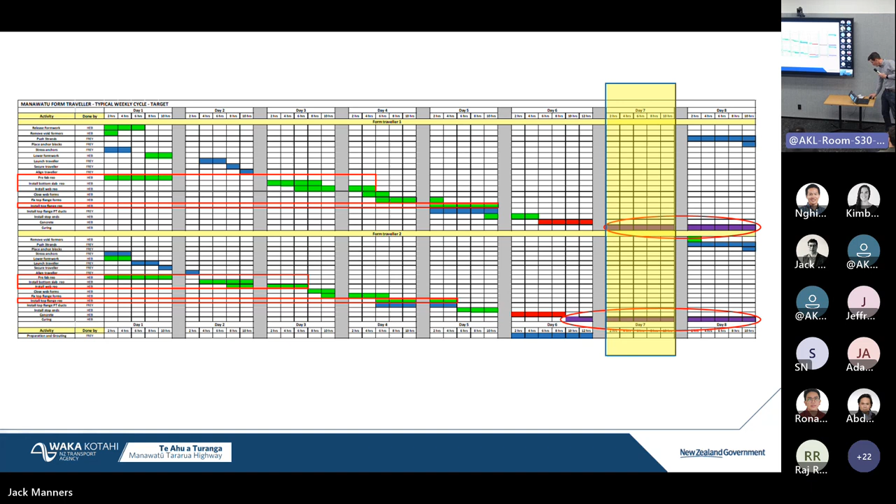I've included this just because we use it as time chainage - it's linked to the program, linked to the segments and construction. It's a really good way for us to identify where we can improve and make efficiencies. The gaps are things where we can buy additional temporary works to speed things up.

Ultimately, as you work through it and reduce those gaps through development and procurement, the only thing you can really do to speed up your program and deliver on time is reduce the size of these little boxes, which is linked to that cycle time - curing, reinforcement, prefabrication, and progressing that form traveller on a repetitive but short duration.

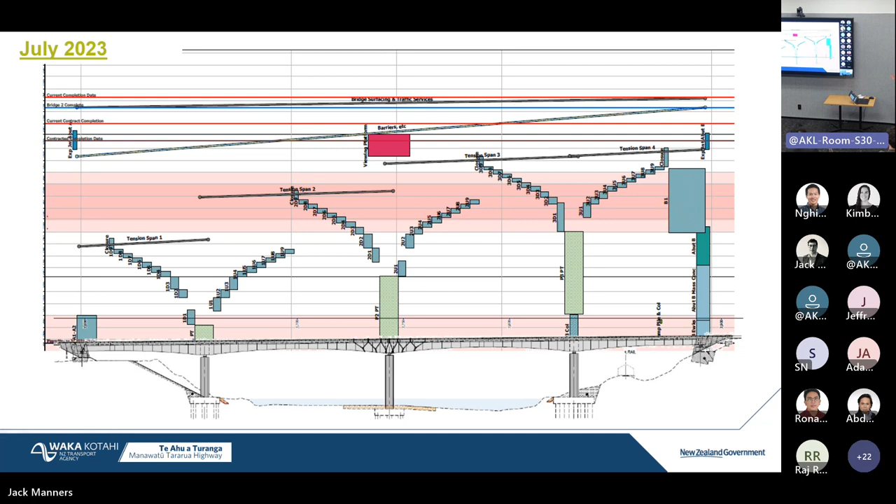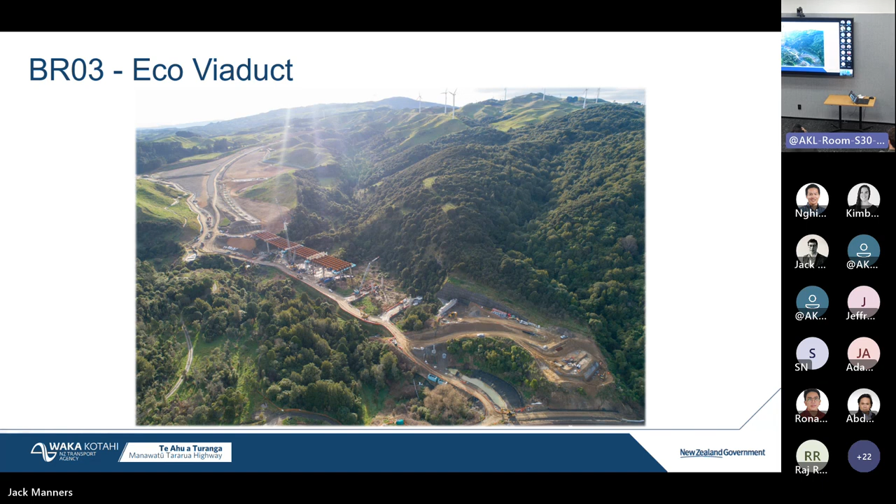So that's bridge 2. Just to touch on bridge 3 - obviously Jack's touched on a few details around challenging ground conditions and highlighted that an aquifer or artesian water pressure might have been an issue, and it certainly was.

This really shows the status of this bridge at the moment. Bridge 3 is progressing incredibly well - we've got 4 spans in place of 7, so 3 left to go. All of the columns bar 1 are complete, both abutments are done, and we'll be landing precast in the next couple of weeks.

So this bridge is a big success story, I think. The team have worked incredibly hard to get to this point. These beams are just made out of Eastbridge in Napier, and were delivered as brace pairs. Brace pairs on the 47 metre span are 100 tonne, so pretty significant loading. There's the pier head, the integral pier head that Jack pointed to. I think you can probably all agree it looks really good. It's a very slender structure. Quality of the finish is good, I think. But yeah, boy, were there a heap of challenges in that.

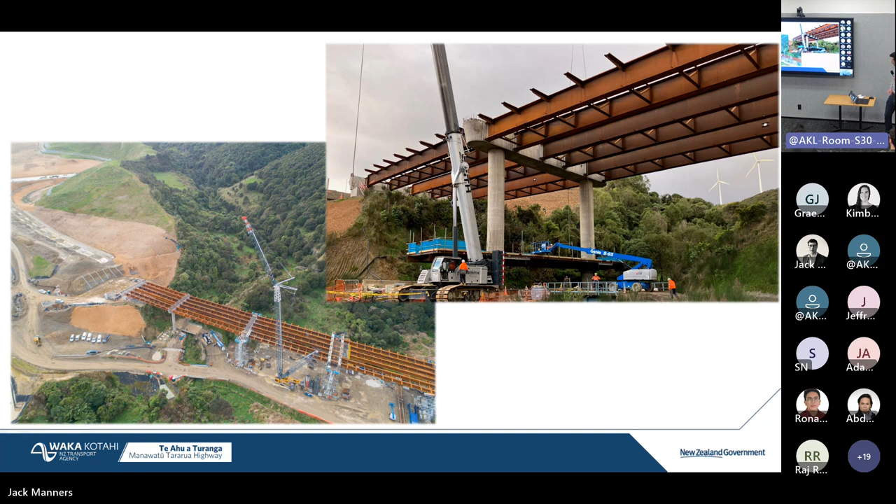So shear studs for one, quantum of reinforcement, shape is a big challenge. Looking at the end radius on those pier heads, that certainly made the congestion and the bar bending tolerances another challenge. Yeah, but I think just in general a really good outcome.

So onto the artesian water pressure. Jack talked about limited GI right through the early stages. It identified 3.5 meters above ground level artesian water pressure, which is, it's artesian water pressure, but it's not huge. But as we went through the ground investigation, or tried to do ground investigation in the early stages, soon found that we couldn't conduct the ground investigation because artesian water pressure was an issue. So there's some proposed locations abandoned at 15.9 meters deep, artesian groundwater, abandoned at 19, and abandoned at 13 for artesian.

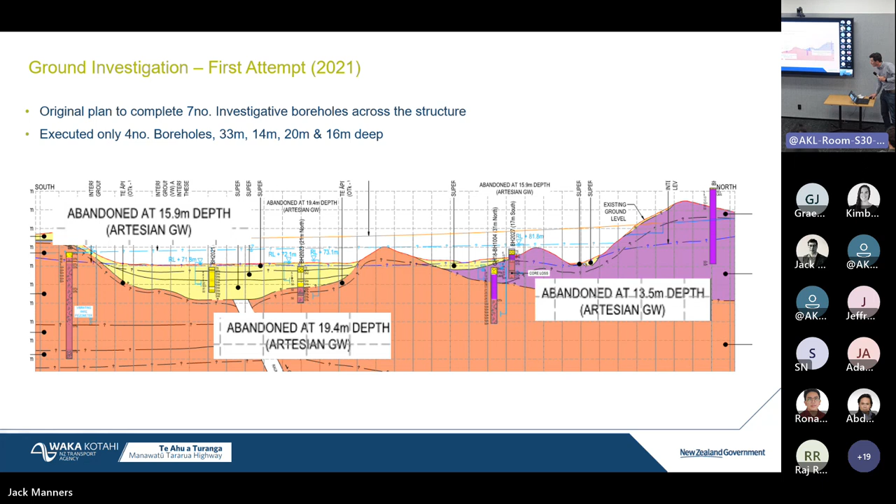So the ones that were undertaken couldn't be conducted because of artesian water pressure. So tender, 3.5 meters above ground level. Original GI, 10 to 12 meters above ground level, but unsure because they couldn't reach that deep in the ground conditions. But the revised ground investigation in 2021, 23 to 24 meters above ground level. So significant artesian water pressure.

Piles going 23 meters deep and 38 meters deep on the others. 23, 24 meters, there we are on the investigation.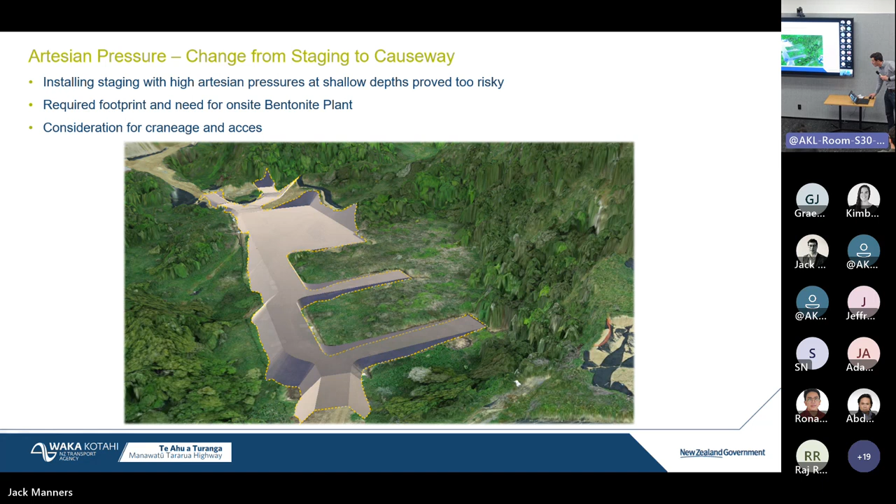So what did that artesian water pressure do other than change the pile methodology? The intention across this wetland was to stage across the wetland. If you're staging across the wetland, the problem is you're punching lots of little holes into the aquifer, which is not a good idea, which meant the design for the access had to change to a fairly significant causeway through the wetland, avoiding these really sensitive wetland areas, which are shown by those little cross box outs there. And we've got native forest either side, so it's an incredibly sensitive environmental area.

Pretty significant numbers, and there's a bit of a cross section showing what the causeway looked like, but significant volumes of undercut, significant volumes of cut to waste through there, and a lot of geogrid. But fortunately, the good outcome is that's now going to remain in place and be a wetland experience through at the end of the project. So it's utilising that temporary works through there.

And just a few photos showing construction of the causeway as it progressed. But yeah, pretty significant in size.

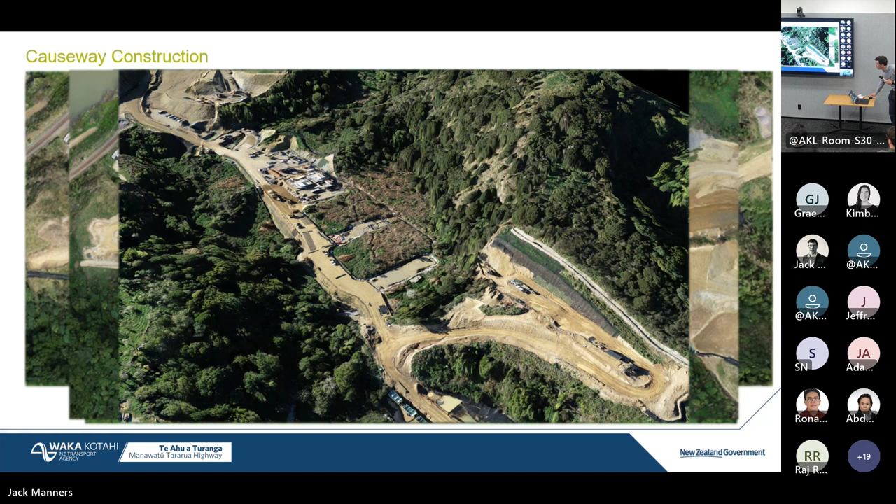So just down the tail end, heaps of geogrid and geofabric. Lots of river run, conglomerate, gap granular material, but then a pretty nice outcome overall. And now that grass has all kind of grown up and the native forest has been rehabilitated. So lots of pest control and ecological control going on in the area.

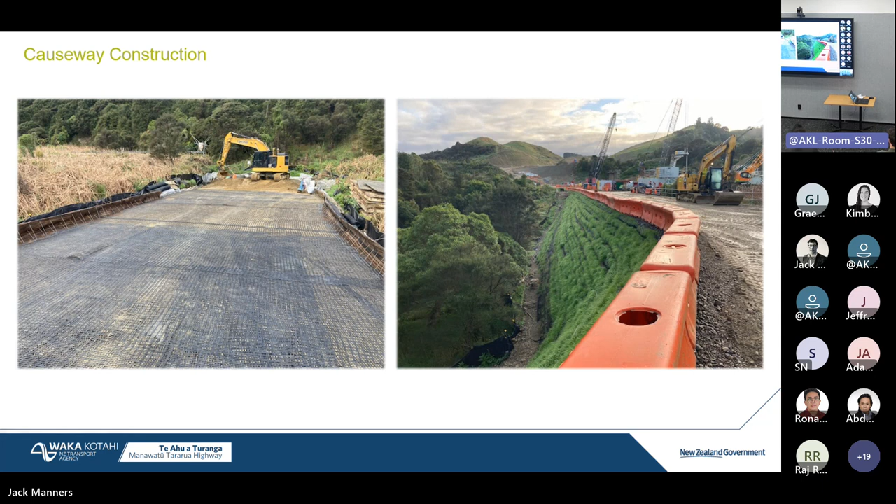Just quickly touch on piling, put 6 meters casing above ground level. Following the revised ground investigation and dewatering, piling actually went really well. We did 15 piles to those depths noted, so 36 and 21 meters roughly within a 4-month period. So generally a really good outcome overall, and the columns progressed pretty quick afterwards.

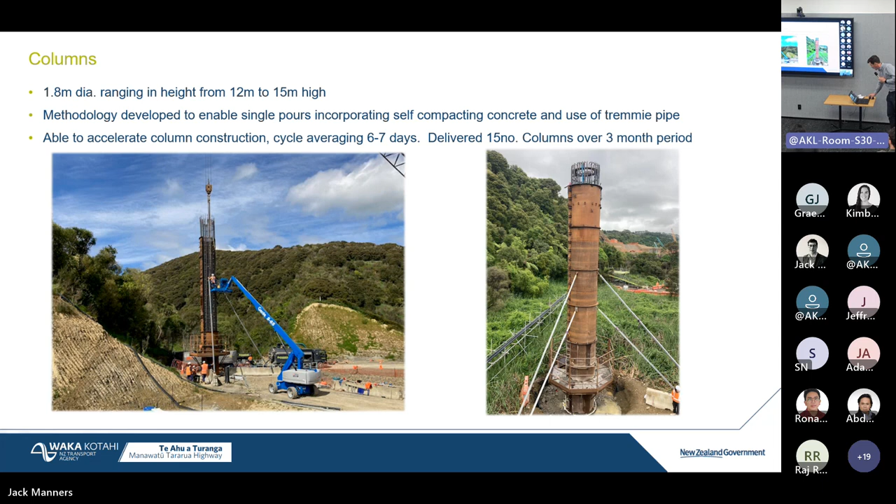Now this wasn't so much a challenge, but the columns was actually a great outcome. When asked for rate of rise on the columns, we just said as quickly as possible and designed the temporary works accordingly. Went through a process of doing concrete mix selection using that self-compacting concrete again, but the cycle time overall improved really well. We spent the money on the temporary works, poured them really, really quickly. And I think the concrete finish on these things overall is absolutely fantastic on every single column. So we haven't had an issue on any of the columns. So just a bit of a good outcome there.

Pier heads, just conscious of time, but pier heads were fully integrated. So integral pier heads as part of that low maintenance design and aesthetic.

The biggest challenge from a construction perspective is the girders, which are fairly significant, 100 tons in braced pairs, so 300 ton per span. They need to be supported while you're pouring the concrete, so it needs to support the concrete, the reo, the girders, and construction loading there as well, and provide reasonable access.

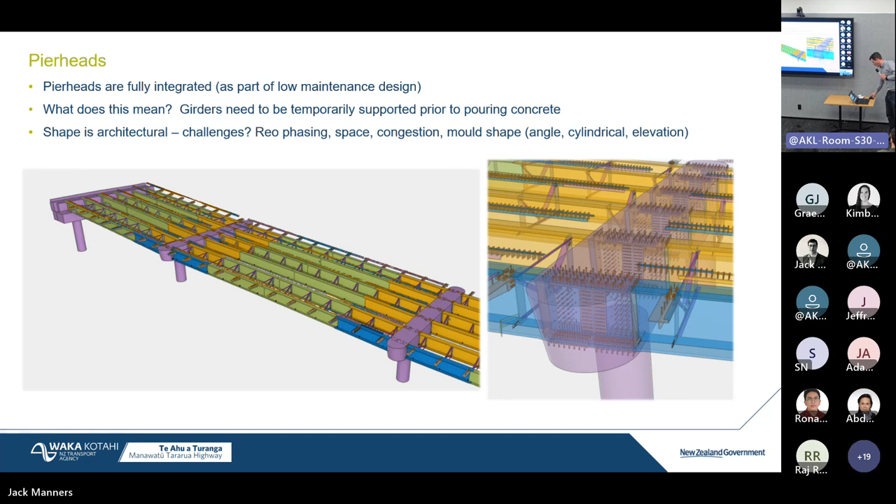But down below, you've also got a wetland, so you can't put foundations for that temporary works into the wetland. So what that means is you ultimately need to drop them down onto the piles themselves or to the bottom of the columns. We ended up with a solution worked through by the temporary works team that transfers the load straight to the pile casing, didn't need to touch down in that wetland, and met the full weight.

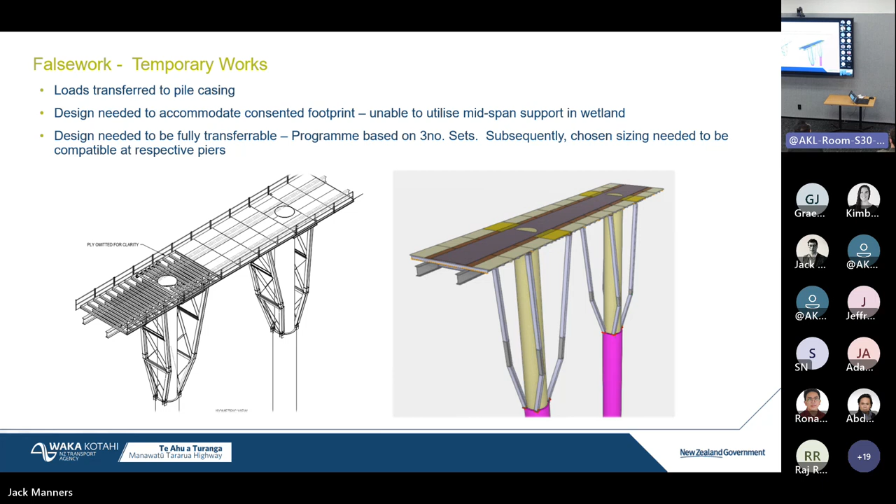The designs were kind of customized, those dark grey sections on the right there, so that they could be jumped and reused pier to pier. They've gone really, really quite well. Looking at them up in the air, you wouldn't think they're going to support all that weight, or that they'd move or displace, but they're tied back to the piers, provided some really good access, and didn't disrupt the wetland.

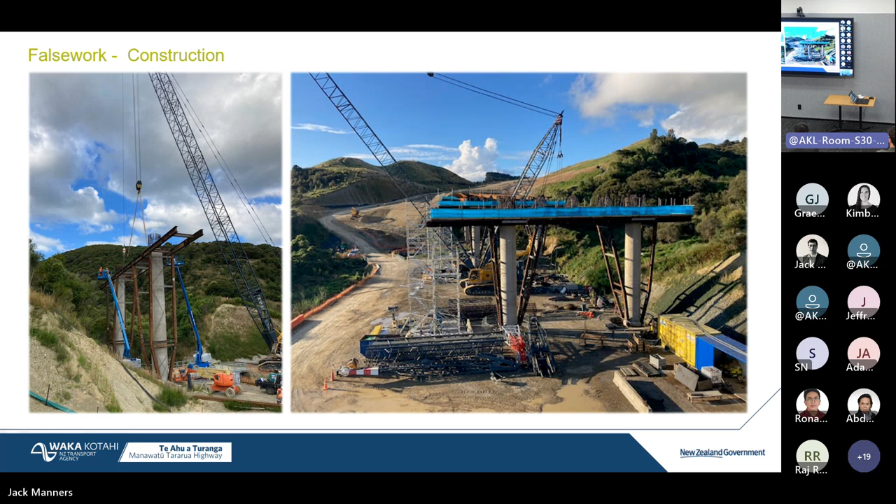So this is our yard, but further back in the picture there's a significant wetland area. There's an aerial view showing them going in and taking the beams, 100 ton, as I said.

One of the challenges around that integral pier head and the way the reo worked is you had to phase your reo installation. So base reo, dropping plates on with studs on, dropping the beams over the top, bolting your base plates to the flanges, and bolting your webs together as well. Quite a significant amount of work in a tight sequence, with a huge amount of congestion.

But the outcome, based on that photo I showed you at the beginning, was really, really good, and the team has done an incredible job down there. Just a few last photos going through.

So to summarise, not just from myself but from all of us here, the effective solutions we have presented have required really collaborative engagement between the permanent works and temporary works designers. I think the earlier that can occur, not at high level concept stage but actually diving down into the detail - in particular like the balanced cantilever and the falsework for bridge 3 on the beam connections - is really key, and it streamlines the whole process. Going through robust optioneering in the early stages of design, and progressing both designs in parallel, not permanent works then temporary works design.